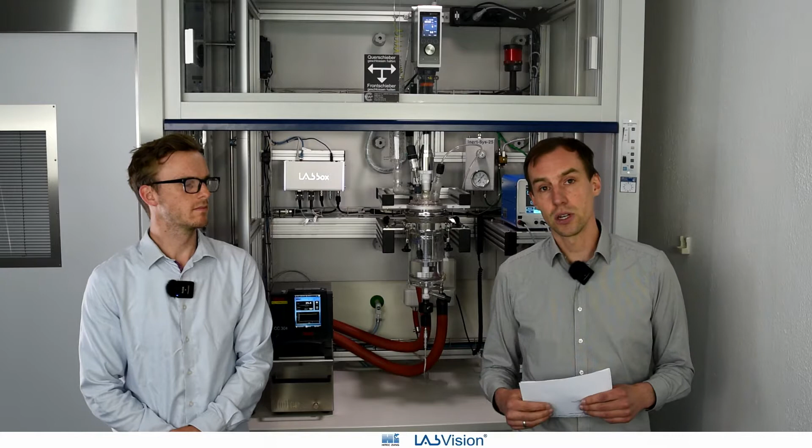Just a couple sentences about ourselves. Florian and I, we work here as project engineers at HiTec Zang. And we mainly do two kinds of projects.

On the one hand side, we do automation projects. That means maybe you have something like a Conti system in your lab or in your pilot plant, and we come to you and automate it with you.

And the second kind of project would be we build turnkey ready plants for you. Then we would deliver the whole plant to your site and do the commissioning with you. And in summary, I think that is also the core business of HiTec Zang, with products around it like syringe dosers and stuff like that. So feel free to visit our booth, the other talks, or even our website.

And I think it's important to mention that we also build our own hardware components for automation, and the software is also developed in-house, right near from Aachen, where we are staying currently.

So should we go to the plant and maybe describe a little bit what we have here today? Yes, and also what we're going to do today. So we automate the entire plant from the ground up.

It was already built, so that's all connected already to the center of the automation, the process near component. And now I'm going to describe the hardware components to you a little bit more so that you have a quick overview about the system.

Then we're going to talk about how the connections are made to the process near component, and then from there to the computer, where actually the person in the lab would sit and interact with the devices in the fume hood, or also program the automation.

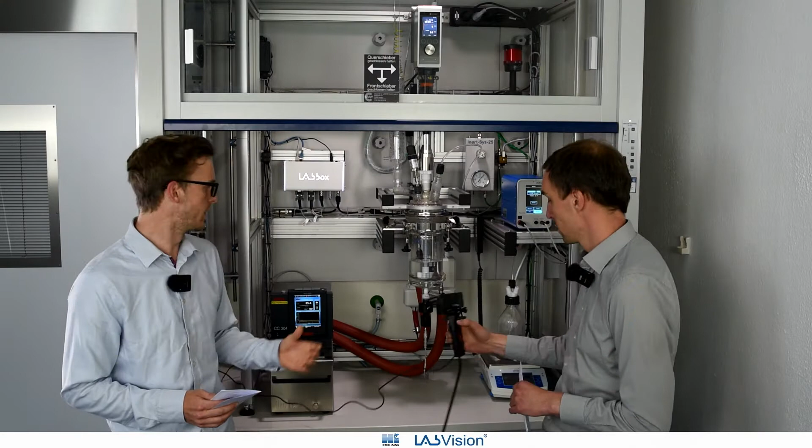It's always really hard to have enough connections at the top. This leaves us with a pressure sensor at the top, so we can also measure under pressure and over pressure in the glass system. And also we have the gas supply here, which in your lab would probably be entered from the nitrogen supply line, but here it's simply pressurized air.

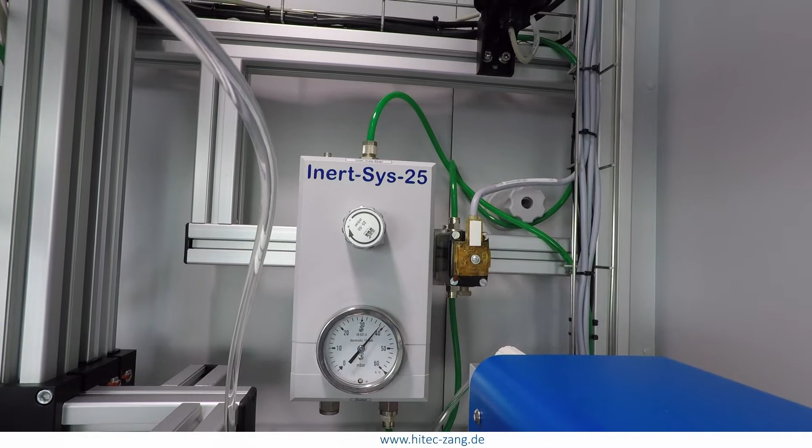Maybe we can show it in a little bit more detail because it's hidden in the back of the setup. So maybe you can show the pressure regulator. From the lab pressure system, the pressure is reduced to a harmless 30 to 60 millibars, so we don't damage the system. And then right next to it, you see the binary valve with which we can control the on and off function of the gas supply line.

From there, it's entering into the reactor, and there's a little diverting system so that we can easily bubble and divert the gas stream in the reactor. Maybe at your lab it would be a nitrogen supply to inert the system. In our system, it's now that we can really see the gas, we are bubbling it into the water right now. So what else do we have?

We have a thermostat so that we can control the temperature of the reactor, either directly the inner temperature or simply the jacket temperature at the outside, depending on what process we want to run.

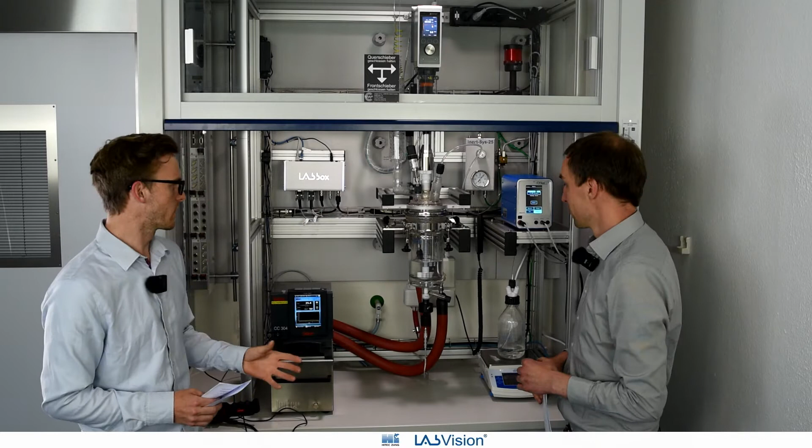Also, we have a dosing unit, a gravimetric dosing unit consisting of a balance where the feed that we want to add into the reactor is placed on the balance. So we always see the weight, and from that difference we can see what actually has been added into the reactor by the pump. It's a membrane pump from the company Fink.

It's made from full PTFE, so it's really highly chemically resistant. And the controller and the software later will see that depending on the difference of the weight, it will tell the pump how fast to pump liquid into the reactor, which gives us really nice opportunities.

Great. What else do we have? We also have a signal lamp on the very top right.

It's a little bit dark, but you'll see it when it's automated later on and flashed. So this gives us the opportunity to show the state of the plant later on.

Yes, so this is mainly the hardware, and it's all connected to the LabBox. And Philip, maybe you can explain what the LabBox is?

Thank you, Florian. So the LabBox is our newest product in our product range, maybe the easiest entry to lab automation, just released this week. And it's placed here, and it has different kinds of connectors to connect all of the equipment.

So here in front you see 4 RS-232 ports. They are mainly used for components like the balance, the Huber, or the Heidolph stirrer. Then we have an analog input, which could be used in our case for the pressure sensor, but a pH probe would be possible as well.

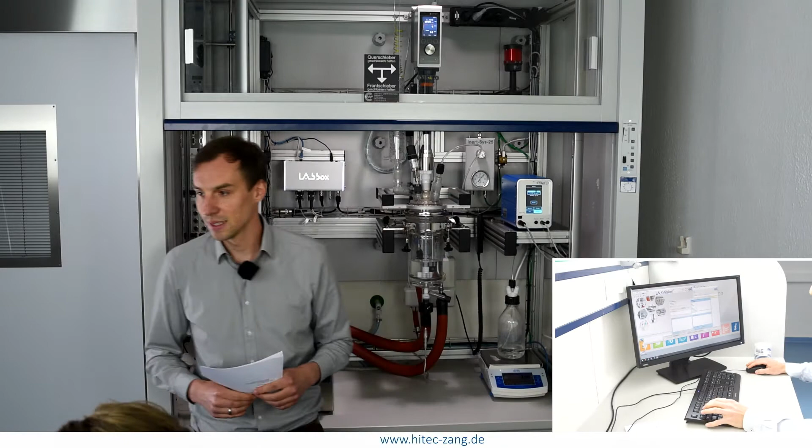I will take a seat. And Philip will remain at the plant, showing you the details that I'm explaining at the computer. Okay, so we're sharing our screen now, so you can see the software.

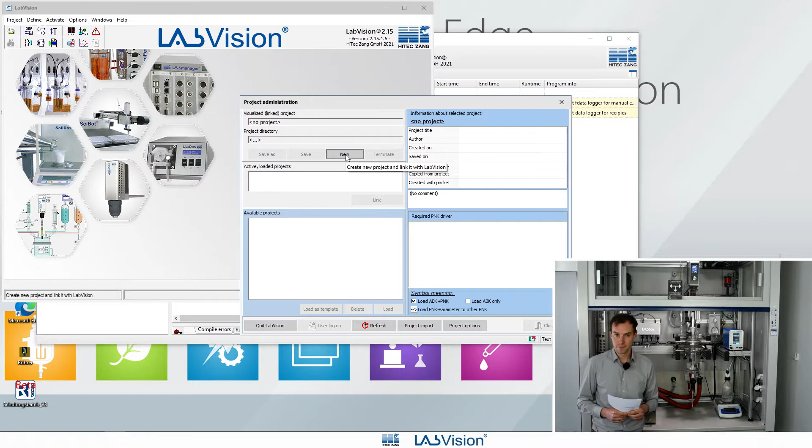And as you see, there's no project, so we're really starting from scratch here. I will create a new project. Turn everything on.

Okay, and that's it. At the very beginning, we would always like to have a quick overview about the plant, especially for unknown users to the plant. That's always really nice. So that's what I'm going to do.

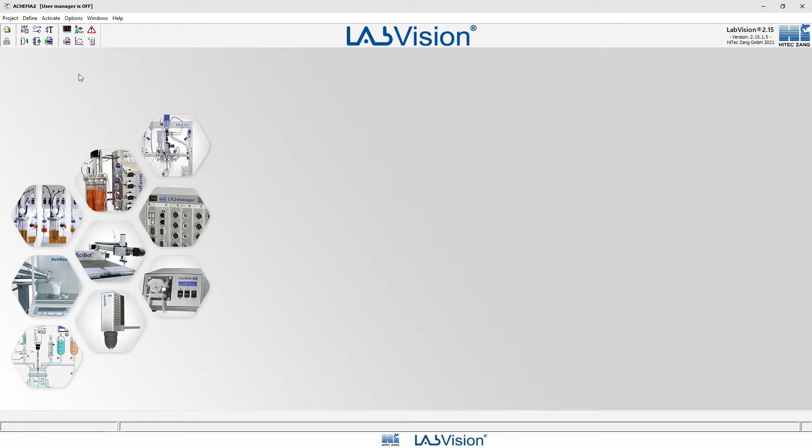We're creating a new workbook. I would call it workbook 1 for the sake of it. There we are. And as a background, it's always nice to have actually the P&ID drawing of the plant.

So I enter the background layer here using the R and I symbol. And I could now drag and draw elements from the library to create such a P&ID, or because the plant was planned by us, we have the P&ID drawing, and I can simply copy and paste it.

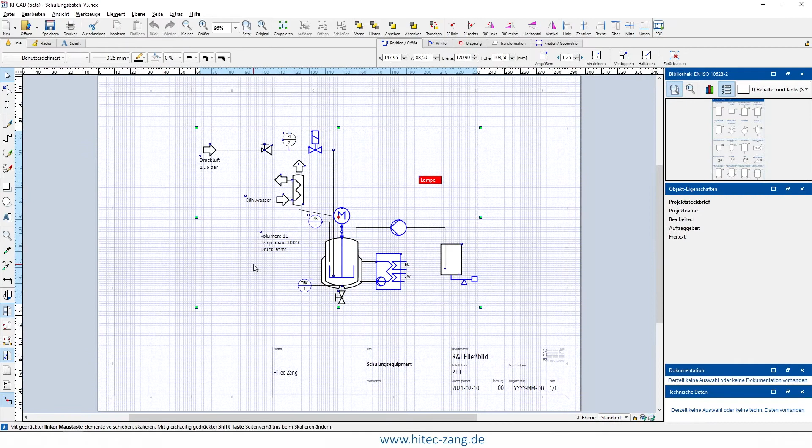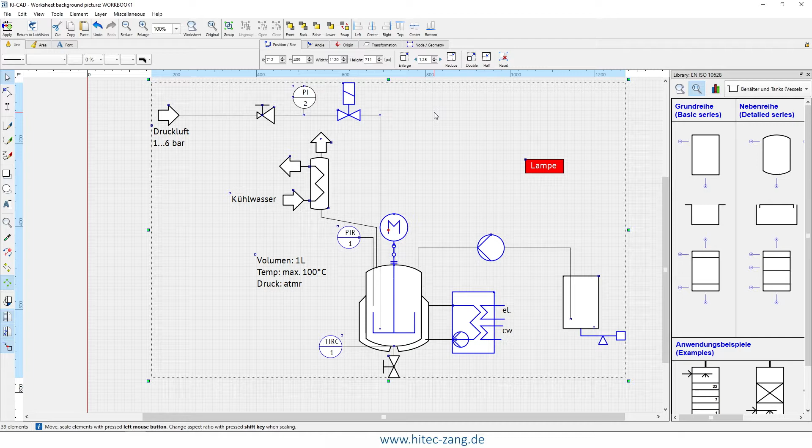Yes, I will make it a little bit bigger, so we'll see everything nicely. And in case it was too fast for some of the participants, what kind of things in the plant we're going to automate, I highlighted them in blue, which gives us a better overview about what we're going to do in this workshop. I exit the background layer and return to the LabVision layer.

We don't need this anymore, so I can close it. And there we are. Okay, so from here...

Typically what we would do is we would enter the background layer and we would create data points or device components, some really background things. And this is especially for beginners. And also, if you do things over and over again, that's not really the way you want to work in a modular lab automation system.

So what we can do now is we use project modules. I will show you real quick how we do this in one example. I think we can start with the stirrer, Philip.

Yes, so I simply right-click somewhere here in the workbook and open the project module library. It's open here, and what I see is the library. There are different categories in this library, and I could expand them, for example, the control functions, to see different control functions from which I could choose.

But instead, I can also search the entire library, entering here, for example, stirrer. Okay, and there we see we have a project module that's called stirrer. So we can click and select it here and see what's in it.

From this picture we see that there's some static drawing and also a panel that will later allow us to control the stirrer. Also in the background there's a device component which will be installed in the software, so our system actually communicates with the Heidolph stirrer.

Okay, so this looks really good. We could use this project module. So let's try it out by instantiating the template.

We go to the next dialog, and here we see that we still need to tell the project module a little bit more information. So we need to tell the system where actually it is connected to the LabBox.

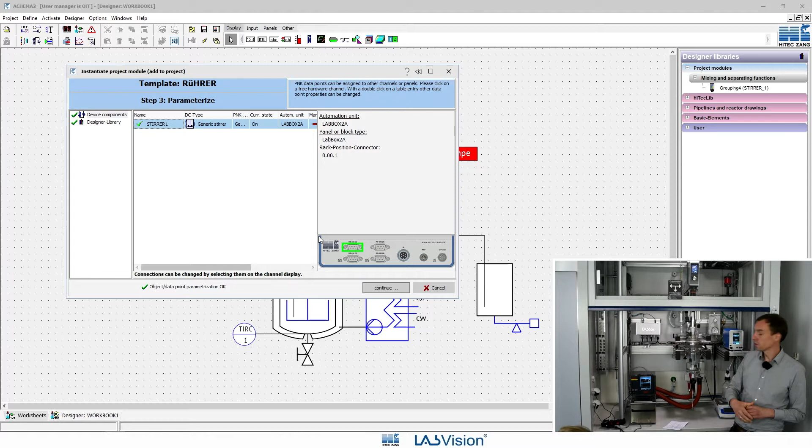We have here a small picture of the LabBox. And I already had a look, Florian. It's the right-hand side, the upper port. Right-hand side upper port. Yeah. Okay.

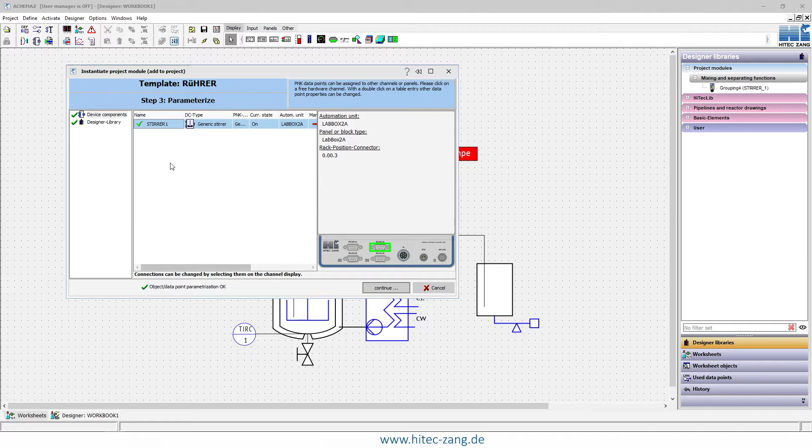This is where we connected the stirrer with the RS-232 cable. It's always, especially if you hide the cables on the plant somewhere, it's always nice to label both sides. Otherwise you're lost tracking all the lines. Definitely, so that's a big advantage.

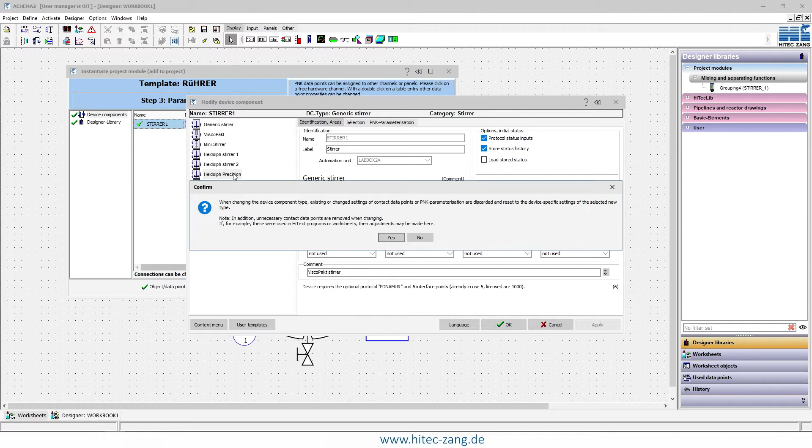Okay, but we still need to tell, that's a generic stirrer, but we need to tell the system that we have a Heidolph stirrer installed here. So I double click on this and tell it, okay, you're not an IKA stirrer or a ViscoPakt from HiTec Zang, you're a Heidolph precision stirrer, which is the newest series. It's labeled on the device itself, and the precision series is with the RS-232 port. Okay, and that's all we need to do here.

And we're done, and I will continue. Now we see what we have done here. We're back at the workbook, and now we have in the library list something new that we also initiated using this project module. Now we'll drag it into the workbook, and that's exactly what we saw in the overview of the library. We have the static picture of the stirrer and the workbook panel.

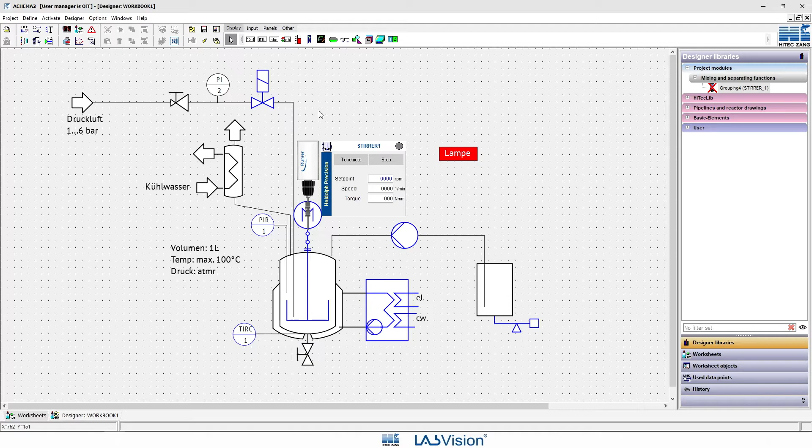Okay, so now we should test the stirrer to see if it's working properly. I will go save and activate the workbook sheet. So we're in active mode now and I can actually use the things I initiated.

With the Heidolph, you still have to set it to remote. Maybe Philip, you can switch to the menu cam and I will click remote. So we should see a change on the stirrer.

Yes, currently we see the small computer symbol. That means the stirrer is now controlled by the control system and cannot be controlled here anymore. So we do have now the connection established. Very nice. Okay, so it's on remote.

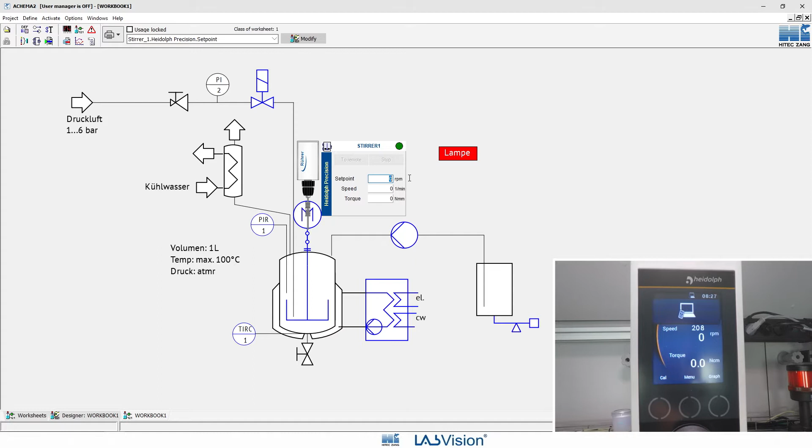We also have the green LED indicating that everything is nice, and we can try to set a new set point. I would choose 150 RPM. Yeah, it's ramping up, so I can see the stirring, even in the reactor the propeller is turning. So yeah, Florian. Okay, very nice. So that worked.

I want to really emphasize here that we saved a lot of work initiating the device component, having to go into a different menu with the software, creating a new panel, linking this panel, etc. So that really saved us some work here, even though it's a relatively simple project module. Yes, we'll see some more advanced examples later on. So I will stop the Heidolph.

Great. Florian, maybe we can ask our participants, is some of this equipment also used in your plant? For example, what kind of stirrers or pumps or thermostats are you using? Maybe we can have a look later in the library, even if we would be able to have your equipment. Yeah, that's a nice idea.

Okay, meanwhile we can continue with automating by going to the next component. I would suggest we continue with the more advanced thing, like the dosing. Yes, the dosing unit, to show really the power of the project modules.

Again, I do the same steps. I right-click on the workbook to create the project module library. Here I try to find something that's useful for me. So we want to initiate a dosing station.

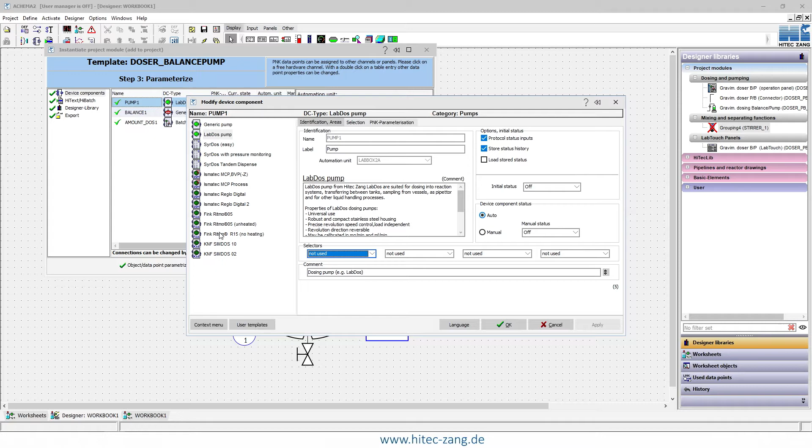Now we still need to tell what sort of pump it is. So I double click, and from the list of the library here, from the devices, I choose what pump it is - it's a Fink pump, the new version, the R15 without heating. I close this dialog. Okay, now we go to the balance.

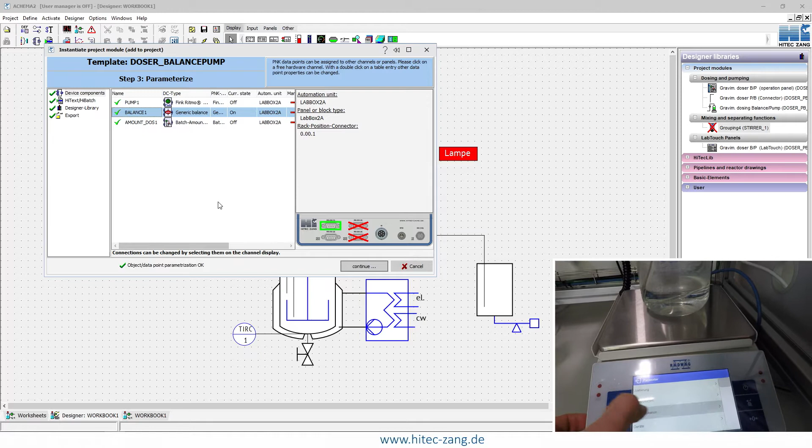Philip, where's the balance attached to, what port? Currently the balance is not connected to a port because it's connected by Ethernet. I can go into the settings of the balance, into communication, where we have a menu called Ethernet with an IP address for this device. You can enter that in the device component. I can't click here which port it is because it's not applicable, so I have to enter a bit deeper into the configuration.

First I choose what sort of balance it is here. Now I'm able to modify - it's not RS232, but Ethernet TCP. When I select that it's not directly attached to the lab box at the front, but it's a serial connection with a network, you see the IP address is enabled, so I can enter here the IP address that Philip can dictate to me now.

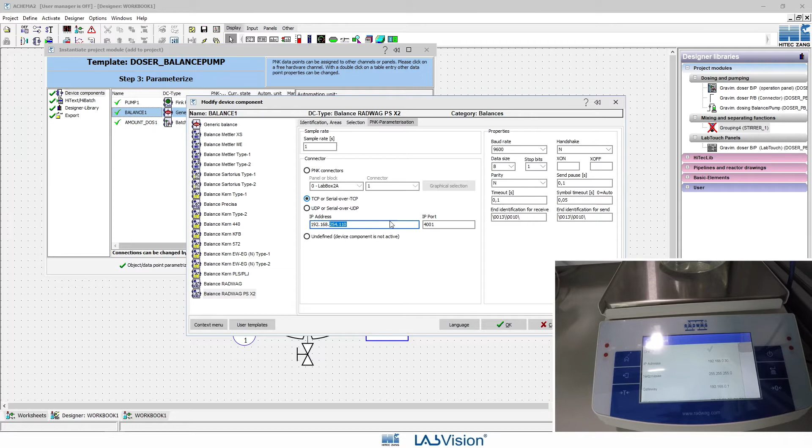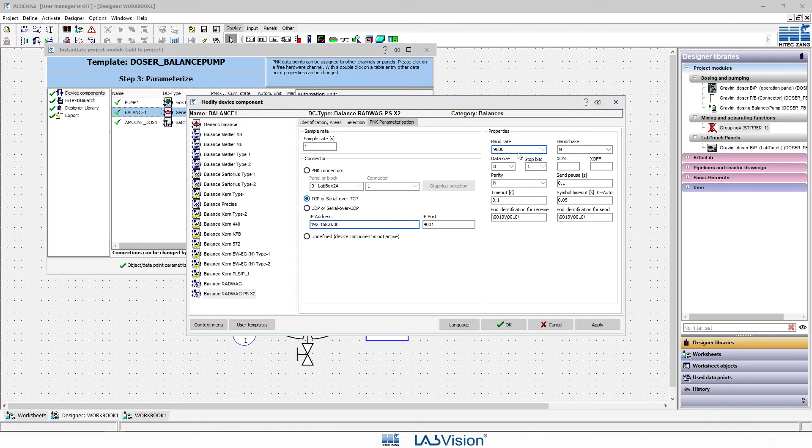192.168.0.30. And the port number, is it correct? From the library, it's telling me the IP port should be 4001, is that correct? Yeah, my colleague was so nice, he labeled it on the balance because this information is sometimes hidden in the menu. That's the advantage from our library elements - you don't need to worry too much about tricky information like the baud rate. Usually they're correct, but they're here in case you need to adjust them. So that's it, we can close the dialog clicking OK, and we're done.

And we can finalize the initiation of the project module. Again, here in our designer library, new elements appear that we can drag and drop into our workbook. The benefit is not only that it's already connected to the structure behind it - the port and the information on what balance it is - but it's also already grouped and looking better than what we could do ourselves in this short time. For example, the balance indicated here as a drawing shows at first glimpse that this is a balance, this is the feed vessel, etc.

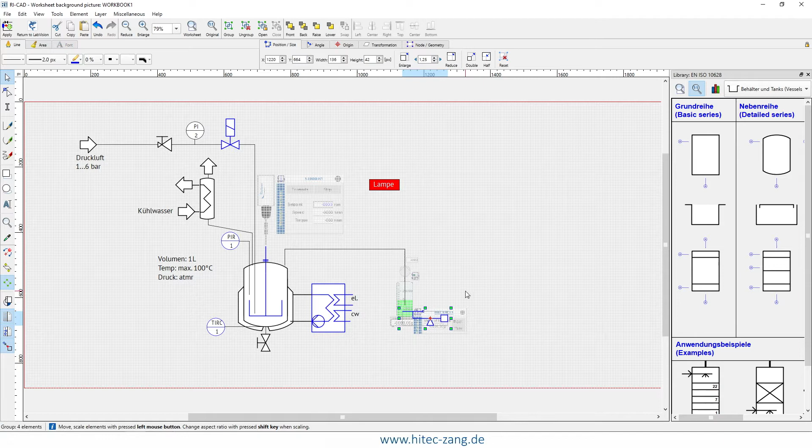In order to make this workbook more appealing, we can enter the background layer and delete some elements we don't need anymore because we replaced them with elements from the designer library. That's also the difference, because as Florian told us, the background picture is more passive, and the elements he placed on top of it will later allow for interactions - active elements showing real numbers, green or gray valves, and stuff like this. So that's the second layer of the worksheet.

Okay, so let's test the dosing unit. I activate the workbook, and we're here in active mode - we can operate the system now. Let's first check the balance. It's indicating negative 2.88 grams. Is that correct? Yeah, that's good. Okay, I'll tare it real quick. Yeah, 0, okay, it's set to 0. So if we dose something now, without needing to compare the numbers, we know exactly what's in the reactor.

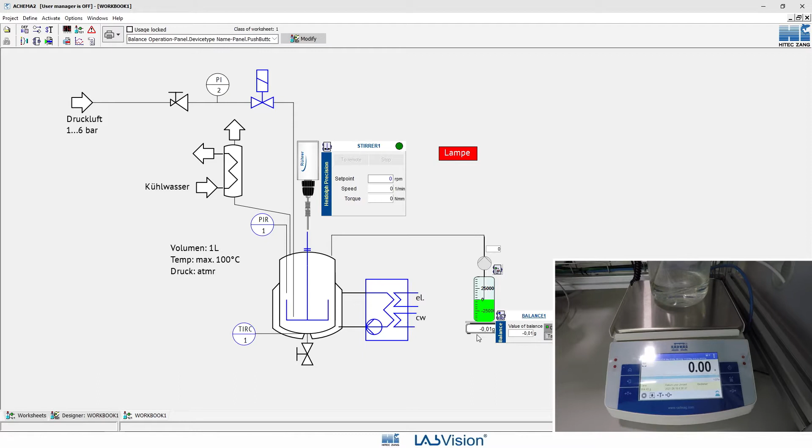Before we check the dosing, we still need to do one thing, which will also show a bit more of what was installed in the background besides the balance and pump. By right-clicking on this dosing unit, or on the balance, I can select data point reference, which shows how the background structure is connected. We see that the project module we initiated, the doser pump balance number 1, is connected to all 3 device components - the balance we installed, the pump, and also in the middle, the dosing controller.

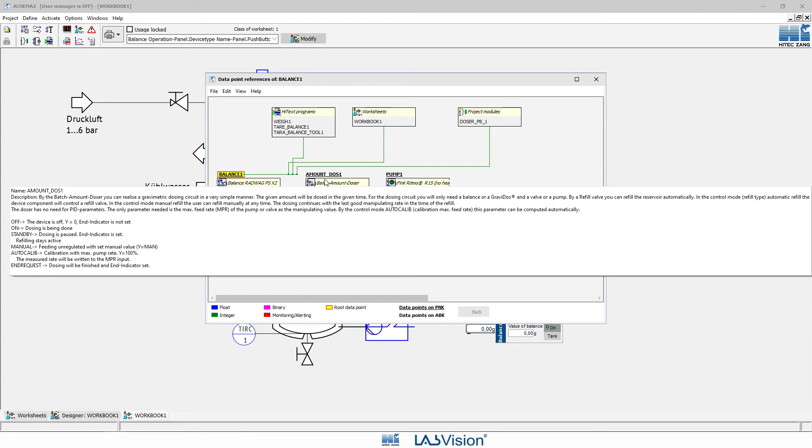But at the end, all of the controlling is built in the CPU of the lab box. The lab box itself has its own intelligence, and it runs the controllers. So even if the PC is shut down, the lab box will still be able to control the system.

So we could create something like a COM error and put the batch reactor system into a safe state if the connection does not appear in an appropriate time. So this is very nice. It's not a stupid connection box, it has its own intelligence, and therefore we can make use of it.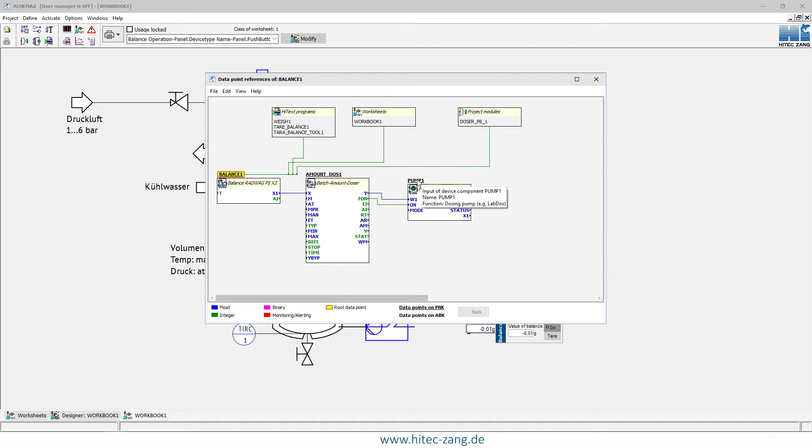So initially the communication is switched off, and we can turn it on here by right-clicking and changing the value of the pump device component, turning it on. This has nothing to do with actually turning the pump on and starting to dose something, it's just the communication.

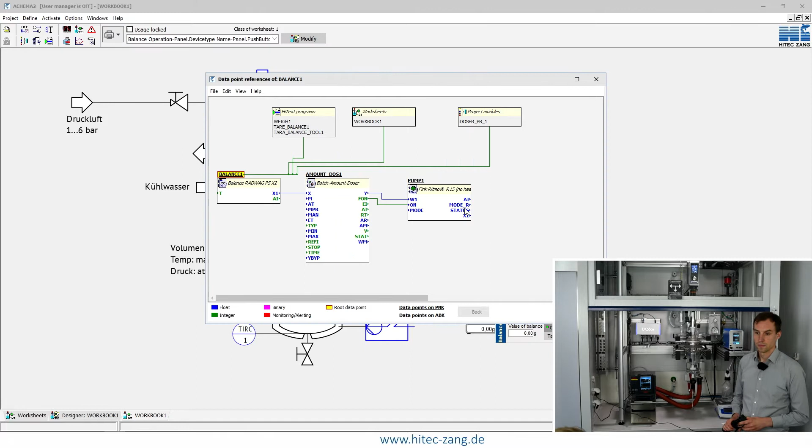We could do the same thing with the balance, but as it's a passive device component, it's already turned on. So the balance worked, and now we can see if the dosing and the pump is working properly.

Yeah, just start the dosing maybe. Yes, I will enter 10 grams in, let's say, 30 seconds. And let's have a look. It's actually dosing. Yeah, so I heard some noise.

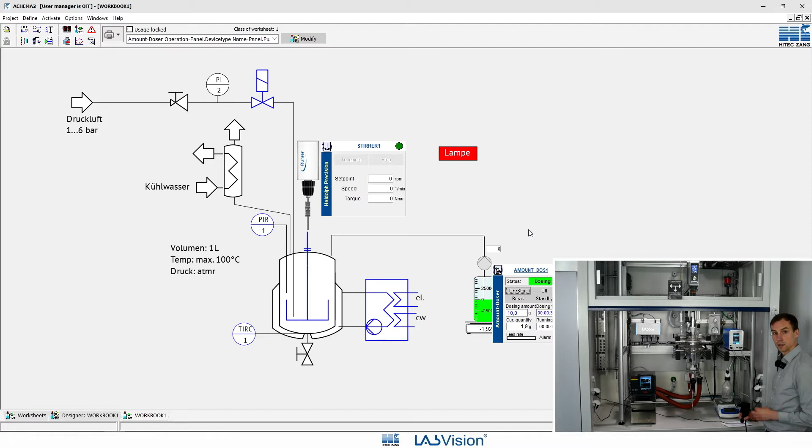Yeah, and it's even displaying, yeah, you directly stopped it. Oh no, great, so we see it. The pump is now controlled by the controller, which was started from the LabVision overview. So yeah, we did this signal check with this one as well.

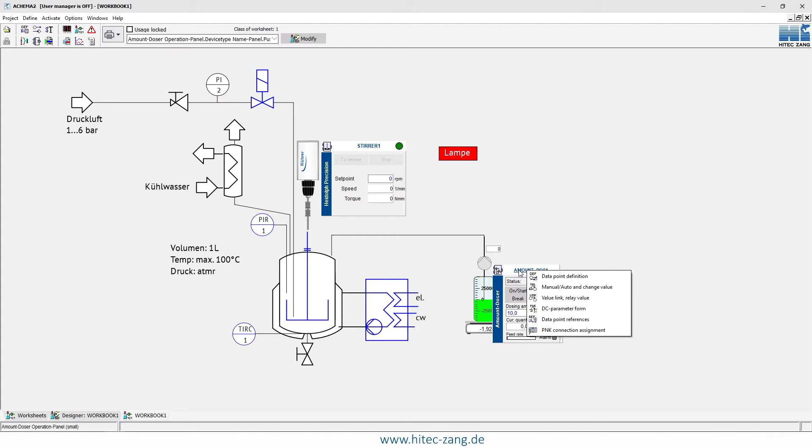Nice. So we see that within 30 seconds we will not reach the 10 grams. This has to do with the parameters of the dosing unit. We don't need to do this now, but if there's interest, we can do this later. There's the possibility, again, right-click here to enter the DC parameter form, where we have more options to configure the controller, such as setting the maximum feed rate, etc., to have a better dosing.

Okay, so that's two device components, two parts of the system already automated. I think we need to speed up a little bit, so we can continue with something more easy, like the binary valve, for example. So you should be familiar with the steps now. I right-click somewhere in the workbook, open the library, and try to find something like the binary valve.

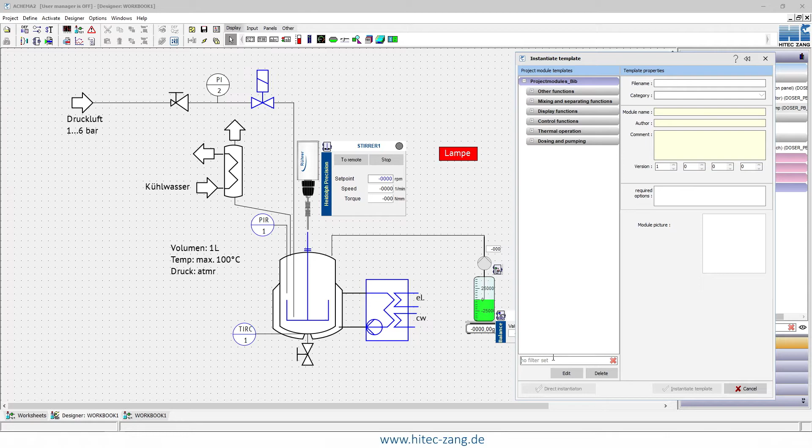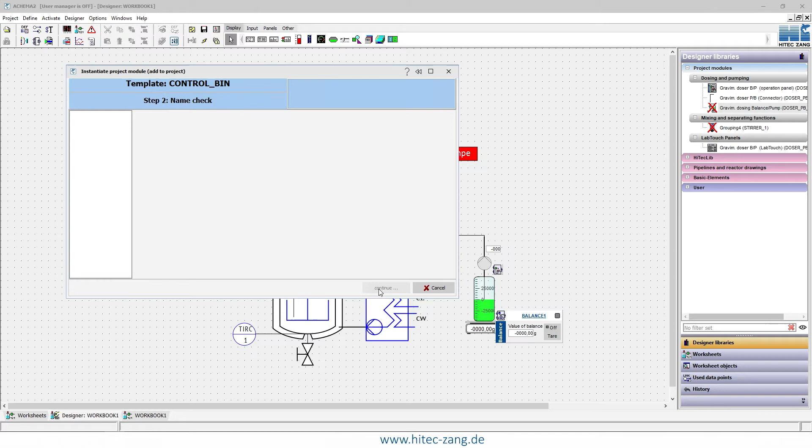Okay, there is no valve, but what we have is a digital output. We can use this, it will do its job. It will be a binary output that will enable us to trigger the valve with on and off, and we'll also see a trigger on the workbook surface. So I create the instance. Since it's just a digital output, I don't need to tell what sort of pump or valve is connected there, I can just continue and finalize it.

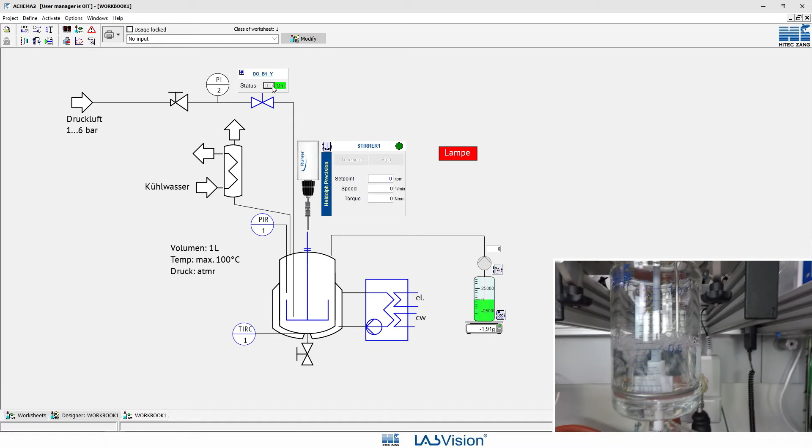Then from the control operation elements, I drag and drop it here to the valve, maybe here, that's a good position. And we can check if by triggering this, the valve will actually turn on. Okay, nice, you hear the clicking sound, you see the bubbles rising in the reactor, and also the LED at the valve. Some valves have an LED at the connector, so I don't know if you see it in the camera, but if I switch it off, the LED will turn off. That's also a nice indicator directly at the plant.

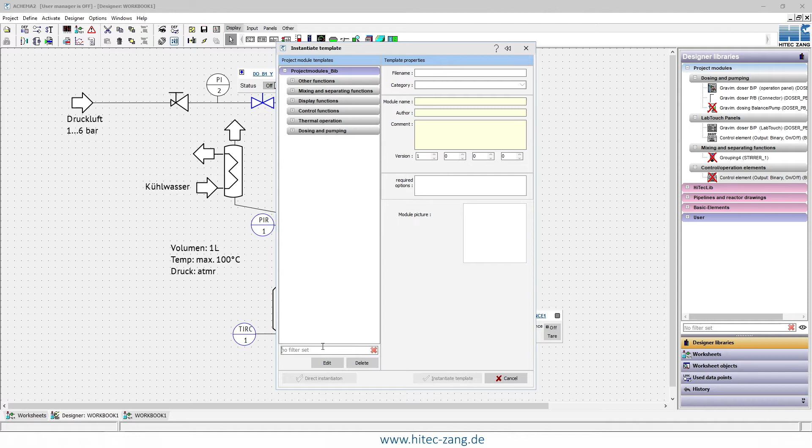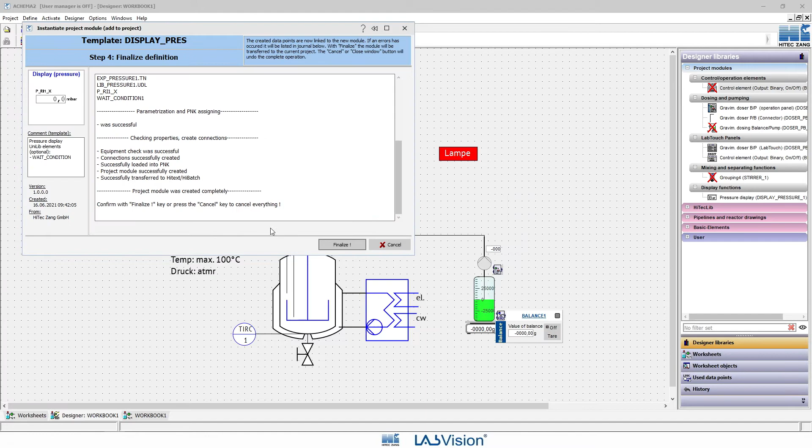Okay, we can continue with the pressure sensor already. Same step, I right click here, create the module, and I search for something like a pressure sensor. Here's a pressure display, which also has a pressure sensor in the background initiated along with it. So I create the instance. I will continue here, I'll tell what connection it's connected to, and we only have one analog input, so that will probably be correct. And I continue here, finalize, and again, the display function here.

If there are too many elements, and you see that some are marked with a red cross, that's because they are already used in this workbook. So in order to have a better overview, I can hide them in the background, which will make it a little bit easier to see what panels I didn't use so far, to find what I actually initiated. Okay, so that's it. Again, I will clean up a little bit the background image.

So would a pressure sensor be more common in your lab, or rather the pH probe as an analog input? Maybe that would be nice to know.

Yes, we also have a project module for pH metering, even for pH control. That would be a bigger project module, like the dosing unit we've seen. The pressure sensor and the binary valve are more simple project modules, but they're also doing the job. You don't need to get used to some other way of working with the software.

Okay, now next we can do the thermostat, which would again be a bit more of a bigger project module. So here I will look for thermostat, and okay, we only have an analog thermostat, and our thermostat is connected with RS-232. Let's see here.

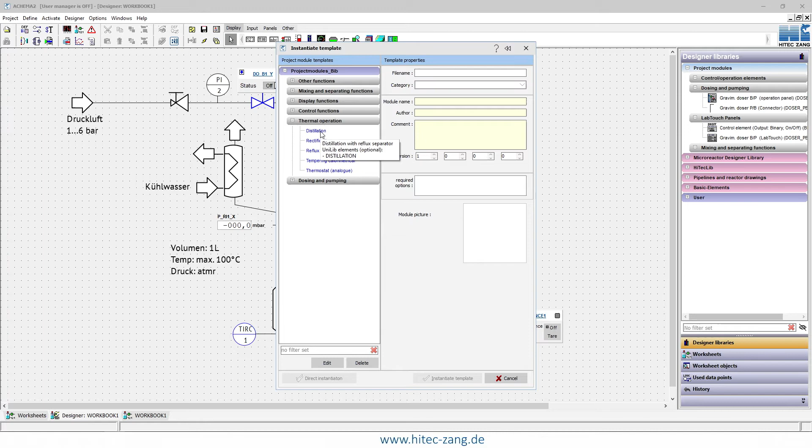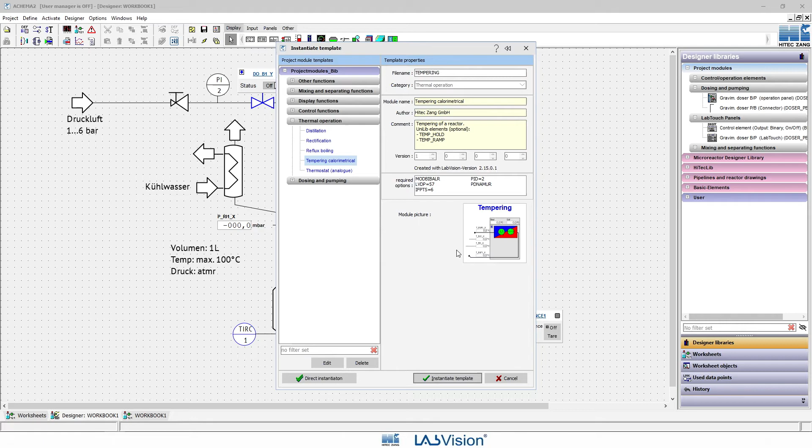Now we have to look in the categories here from the library, and in the thermal functions we find something useful. We have distillation - this won't do the job - but tempering calorimetrical, that looks better. In the picture we see that there's a thermostat and also some PT100s to the reactor, so we'll be able to automate more than just one thing with one project module.

So I initiate the template, I continue. And okay, here we see that we have a warning that we are not allowed to create these data points, because we don't have the necessary connections at the lab box, at the PNK.

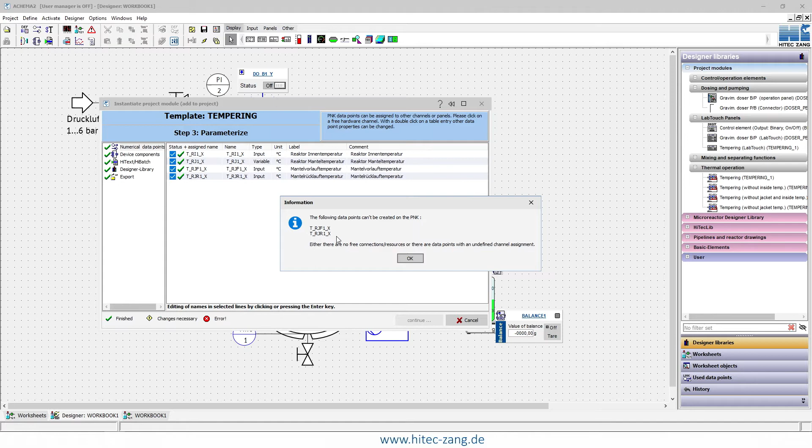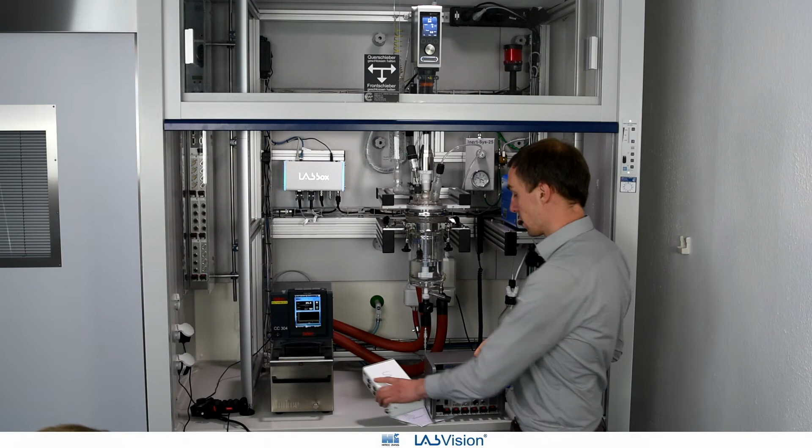Maybe I can show that. As I introduced at the beginning, we have only one port at the lab box, but if you use something like a calorimetric reactor, you would rather use a bigger system where you could place modules for more temperature probes like this one, so you could then connect more temperature probes. So this project module is currently a little bit too powerful.

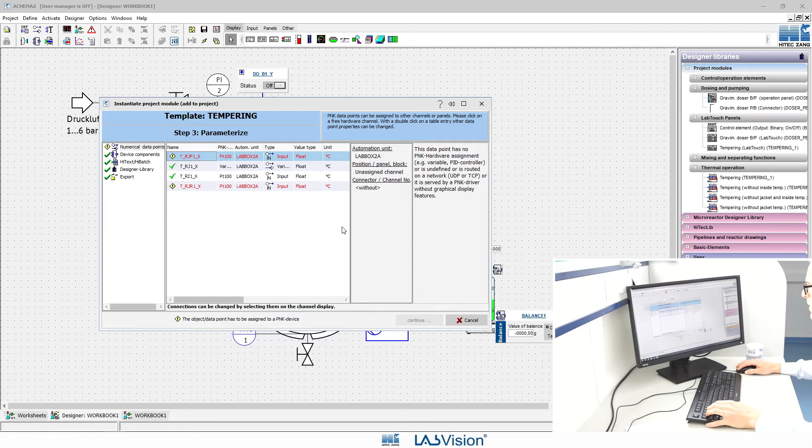Maybe we can reduce the functionality and still use it? Yes, exactly, that's possible with the project modules. What Philip mentioned already is that we have 2 additional temperature sensors here, indicated in red with an exclamation mark, meaning we can't instantiate them - we don't have them in the equipment and we can't connect them. Okay, so we cancel this, and we can still use this same project module.

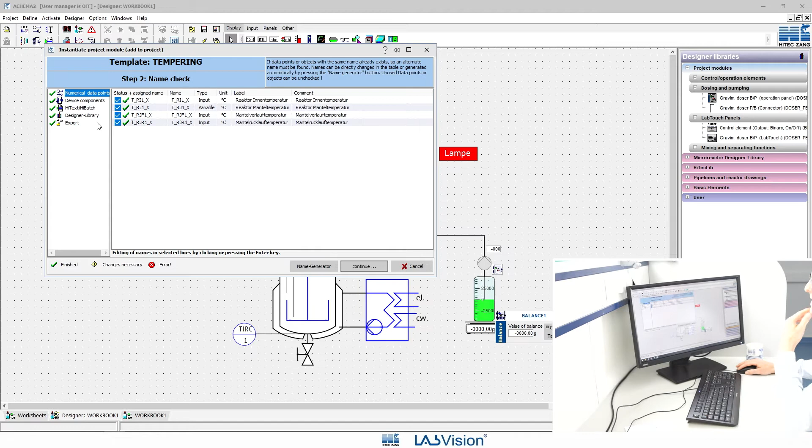So we will open it again, and just by deselecting this box we see one step in between, and here we can look through the project module, what is installed if we create this project module, and we can deselect certain options from it. So here we have the temperature of the reactor jacket, the input and the output, and we can just deselect them.

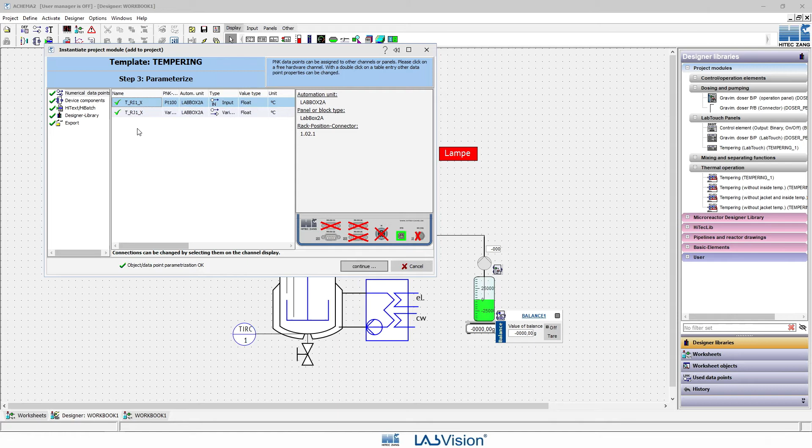And if I continue now there shouldn't be any errors, and yes, the error is not here anymore, and the PT100s are not listed again. So we can again choose the PT100 that is installed. We can choose that it's here in the box, there's only one connector, so that's fine. But we still need to tell the thermostat where it's connected to and what sort of thermostat it is.

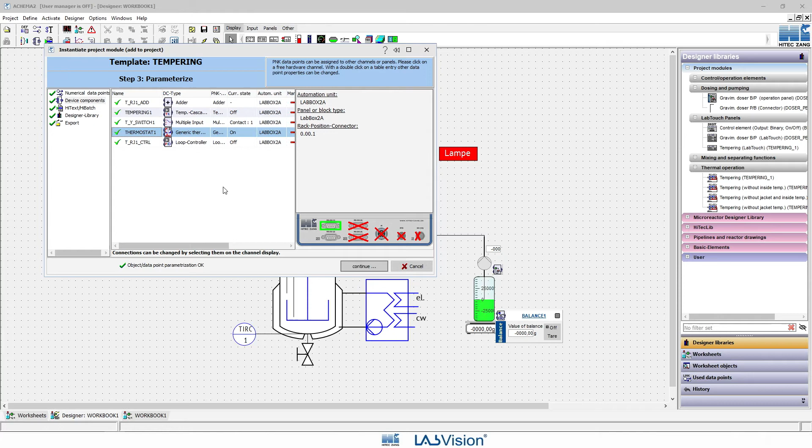Just as we've done with the stirrer and the pump and the balance - so where is the thermostat connected to? The lower port. Okay, and I still need to tell what sort of thermostat it is.

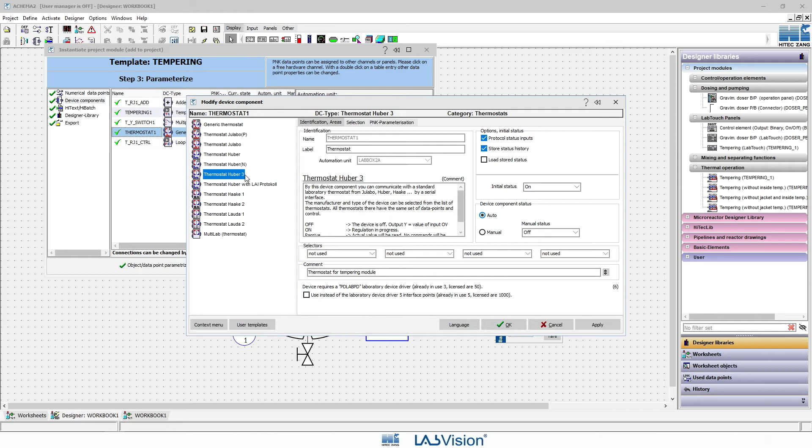So I double click here on this device component again, and I say that it's a Huber, a thermostat from Huber, and it's the newest one, so I will go with the Huber number 3. I think this will work. If not, we can still select some other device component later on.

Maybe to explain it - Huber delivers thermostats for many years, and therefore they have sometimes different kinds of control commands used in their system. So the older versions would be, for example, the more older Hubers, and the newer one for the newest.

Maybe we can do the instantiation now.

Takes a little bit longer because there's more installed. And again, here with the library, we have different options because it's a bigger project module, and we'll go for designer element without the jacket temperature.

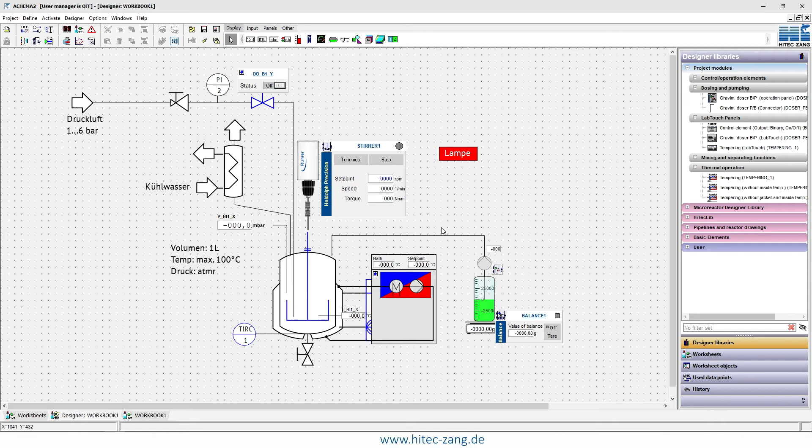I'll drag and drop it here, and we see that this is exactly what we want. But if our system looked different, we could simply choose something different using the same project module. Okay, I will quickly delete some of the background elements.

The temperature sensor is here on the right now. The thermostat is also with the more visualized elements in the workbook. And I activate the workbook to go into active mode, and we can see if the thermostat and the PT100 can be controlled.

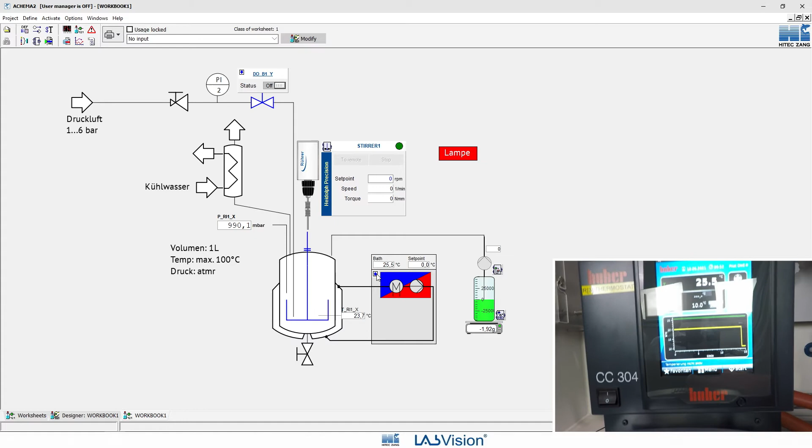So Philip, I already see the temperature sensor and thermostat, it's already giving me a signal of 25.5 bath temperature. Yeah, that's right. Maybe it's a little bit off, yeah.

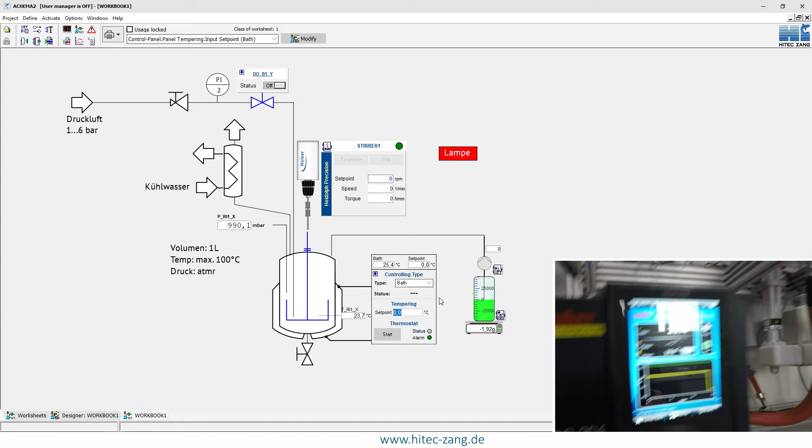Okay, so we can see it right now. I can try to send a new set point of, for example, 30 degrees, and I can start the thermostat. Yeah, so the 30 degrees are now here, and the pump here is rotating.

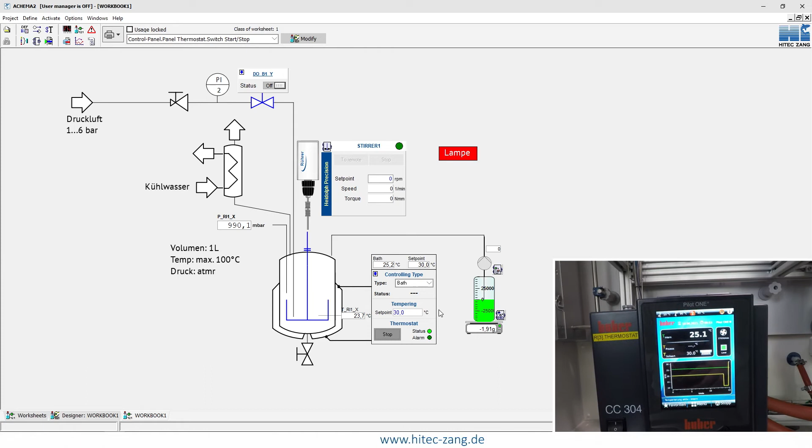So we are now at temperature. We do now have the temperature control of the reactor. Okay, and maybe to show how great and powerful this project module and also its function is, we can just control the thermostat by it, or what we can also do with this project module is...

If we take a look again at the underlying structure, right-clicking on something in this group and selecting data point reference, we see that a lot more was initiated. There were some controllers initiated, also some switches. We don't need to worry too much about it if we're not interested.

But if we are, we can select - we don't want to control the bath of the thermostat, but we want to control the inside temperature of the reactor. We can switch it on, and now we can send a set point for the reactor itself.

And then the set point for the reactor will be adjusted accordingly. So we want to reach 30 degrees inside the reactor. It's 23.7 right now. So the controller in the background, even though it's not parameterized 100% correctly, is already sending 36.7 degrees, a little bit higher than 30, in order to reach the desired temperature quicker.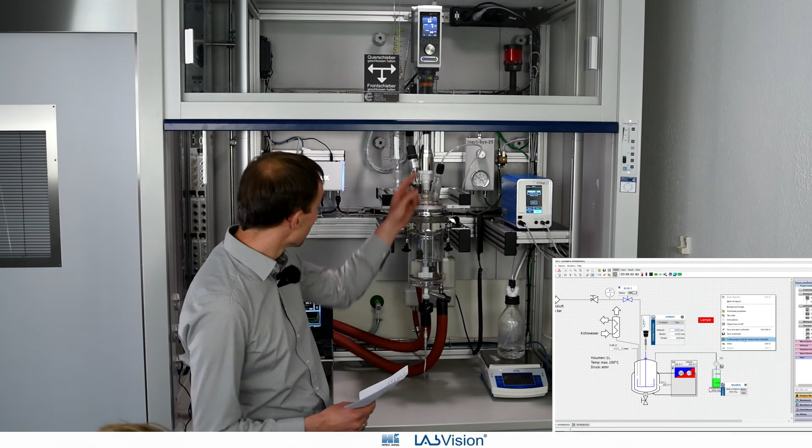Great, Florian. So due to the time, maybe we can just do the last one, the alarm signal lamp, and maybe you can do it in a shorter way, and I will explain the function of the project modules, because what happens if there's no project module which fits your needs - then you can imagine that you will be able to create project modules for a defined group of components yourself.

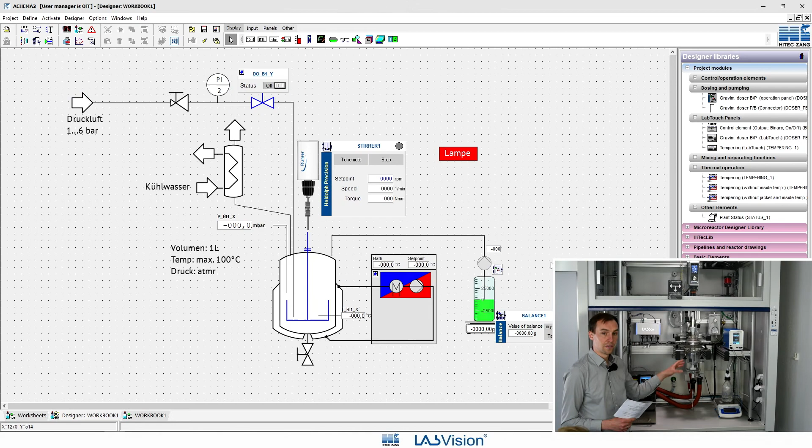And that is quite useful, and that is also something Florian did with this signal lamp. He created this module by himself, and he can reuse it now in different projects. And that would also be possible in your company.

For example, a colleague in the lab creates a project module which is very nice for a gas dosing system or something like that, and the colleague in the lab floor down can use it as well and does not have to start from scratch. So yeah, I think this is really nice. You already did it, and yeah, that's great.

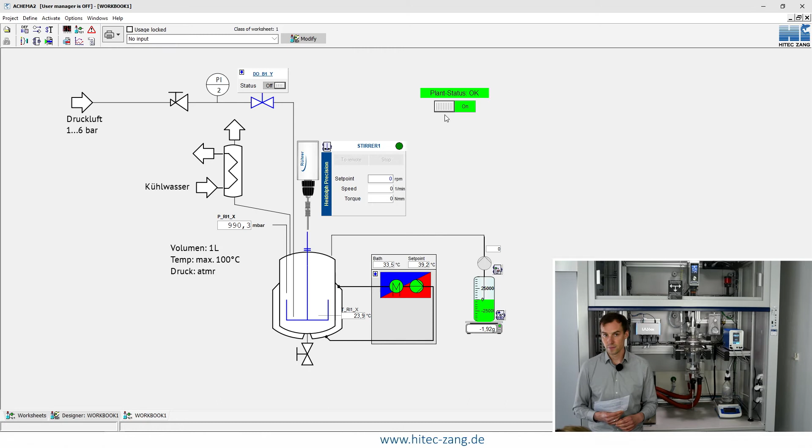Florian? Yeah, so while you were explaining the project module, I already tested the function. Here, having the plant status, which is saying okay - now the user says plant status is okay and everything is fine. But we can also lock the plant, and then the signal lamp indicates this.

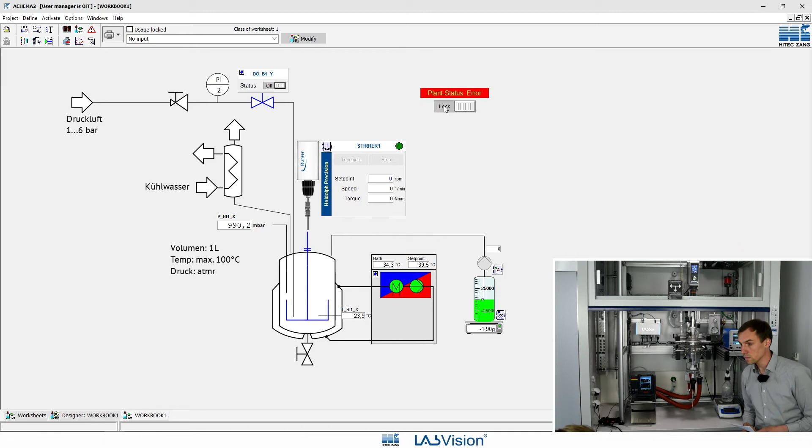Yeah, so this project module is a little bit more than just the lamp, even though we can use it just as the lamp if we want to. If we right click here again, we see that there's some more behind this.

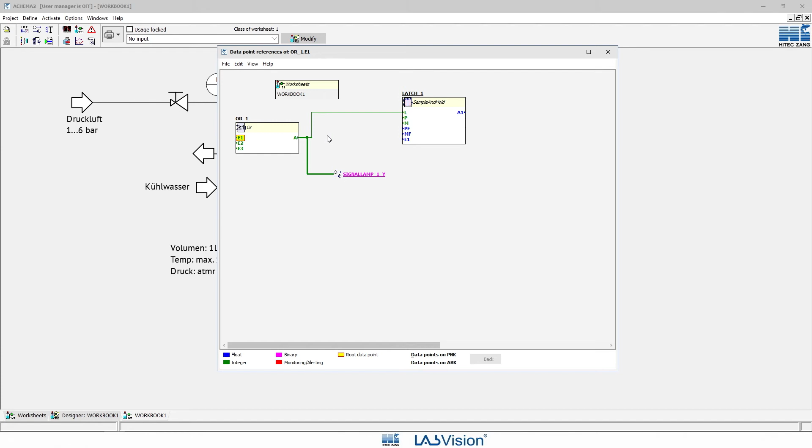There's an alarm collector, so to say, which is the switch on the workbook surface, but we could also have a temperature alarm or a pressure alarm here collected, and no matter which, if one of those alarms triggers, we'll have a latch - something like, if we want to explain it shortly, an alarm function that can trigger what Philip mentioned earlier, maybe stopping the dosing or the thermostat setting a new set point.

Great, Florian, I think we did the signal check. I think so too, yeah.

So yeah, the components we had in mind to automate are now currently connected to the box, and the box is connected to the PC. And in the software, we now have the opportunity to control all of the equipment we talked about. And maybe I will have a look into the chat.

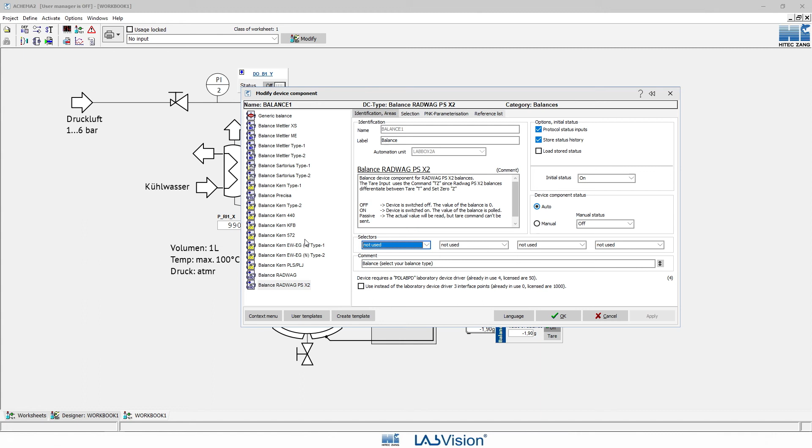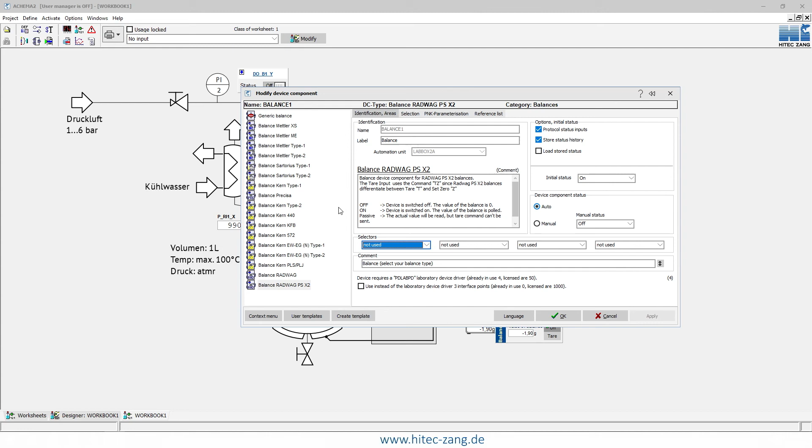We can still enter the manipulating layer, and so, for example, right click here and parameterize this one specific device component. We can do the same thing that we did during installation of the project module - we can choose a different device component now, for example a Mettler balance or a Sartorius balance.

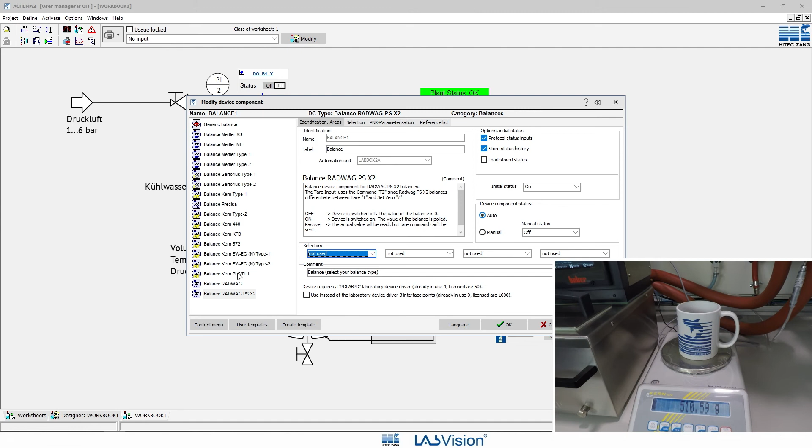But Philip, can you tell me what balance is here? In this case, we have a Kern 572. Okay, so that's here, we have it in our library. If not, we could have a NAMUR template, or depending on what protocol is used, a Modbus template, and we would need to create our own device component. But that's also possible - it's a bit more work, and you need to know what you're doing, but it's possible.

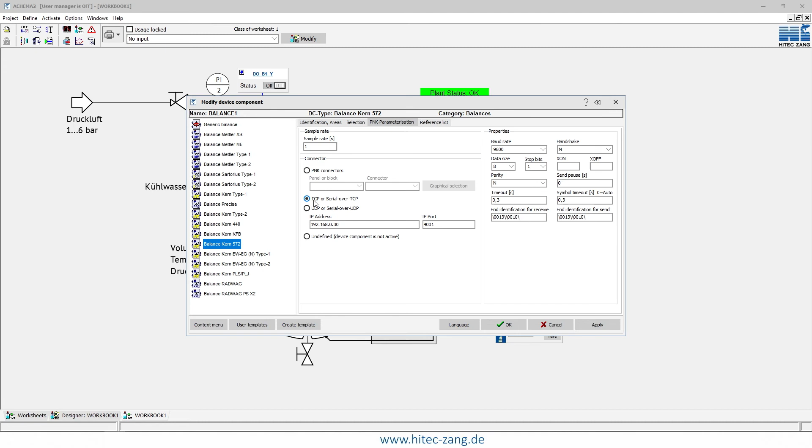And for parameterization, we're not on Ethernet anymore, but on a serial cable, I saw. Yes, and to be honest, now the choosing is simple because there was only one port left for me. So I guess it's the top left, Philip? Yeah, that's right. Okay, perfect. So I chose this - it's the same graphical selection that we've seen with the project modules. We can enter OK here.

And we see a value of negative - no, okay, now it switched, that was the old balance. Now it's 510 grams. Yeah, that's right. Correct? Yeah, okay, we can also check the tare function. Yeah, please. Yeah, it has tare.

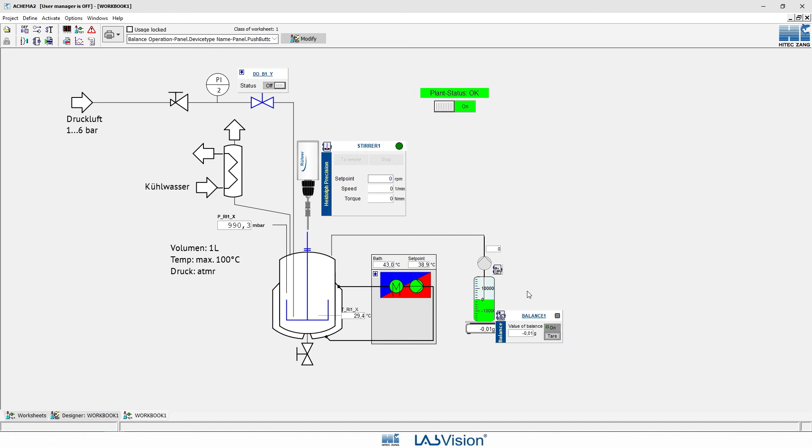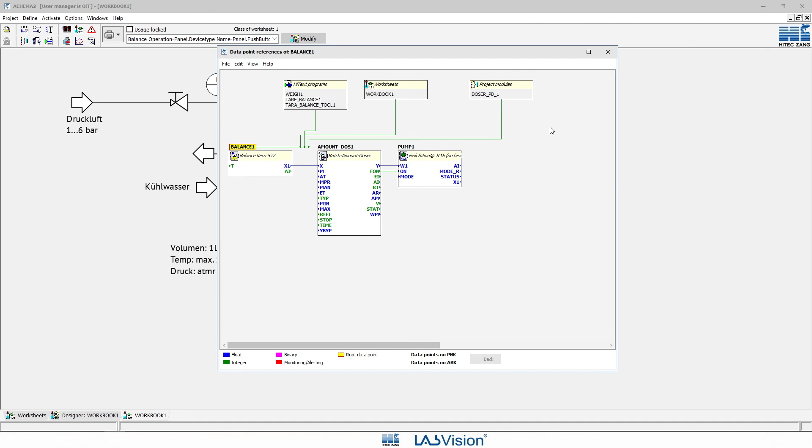And again here, even though we changed the balance, if we wouldn't work in a modular way, we would now have to connect everything again and test. But here you see that the balance is still connected to the doser, which is still connected to the pump. So the dosing unit would work just the way it did before, but we changed the balance in a really modular and quick way, which I think is really nice.

Yeah, so there we have a question. Thanks for the compliment on the presentation - we also really like to automate them ourselves. So we can type in later the contact details, my email and your email address. Yes, I think it will even be possible to contact us through this Achema Pulse system.

Contact details - we will write our emails in the chat afterwards before we leave the system. And then we're really happy to get in touch with you to discuss your needs, maybe different kinds of components, maybe analytical components, maybe more of a flow system. And there will also be more talks this day focused on bigger plants like a mini plant, and also on flow chemistry or closed loop control. So have a look at our site - I think the colleagues have prepared nice talks too.

So we are nearly at the end. Maybe we can take another question if there is one. If not, we managed it rather in time, and we will be very thankful for your participation and interest in this well-designed modular system.

Thanks, we like it as well, and we try to really push it to the customers so that they do not get lost in the more complex way, but can use this easier way. And if it gets more complex, we can still use the other functionalities, as Florian has explained. Exactly, so it's not a one-way street - we can use both of them. And we are very happy that we managed it in time to control the plant.